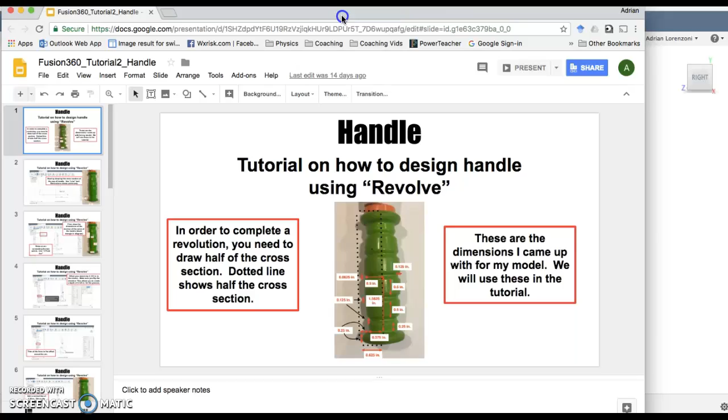So let's see, we're in sketch mode. We're going to use the line. This will go over 0.625. Go up 0.25. Over 0.25, and that's it for now.

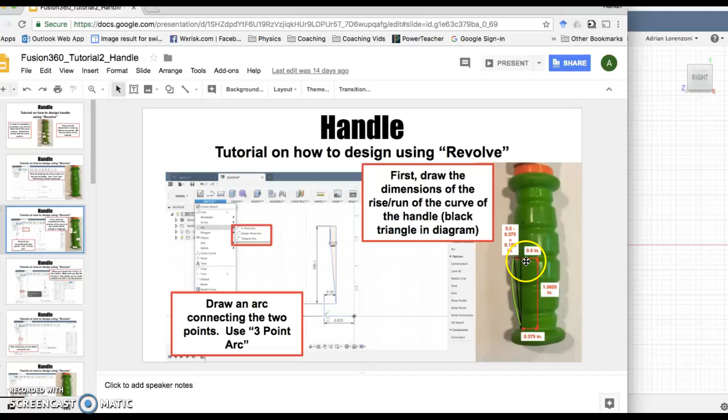So, escape. Okay, to give you an idea of the next step, we're drawing the arc. We want to draw this arc here basically. We go up 1.5625 and only over 0.125, which is the difference between 0.5 and 0.375. This will make sense as we go along. Up 1.5625, over 0.125. Perfect.

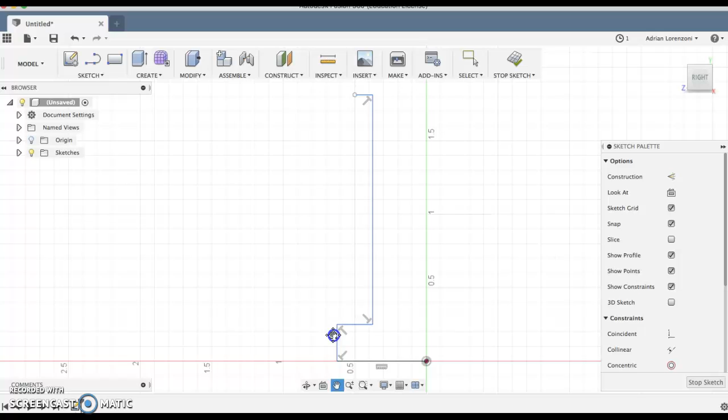Now that we have that, we're going to create the arc sketch—an approximate shape of it. Don't want to go in over here, obviously. Hold on, let me zoom in a little better, and around a little bit. Gotcha. There we go. Now we have the arc.

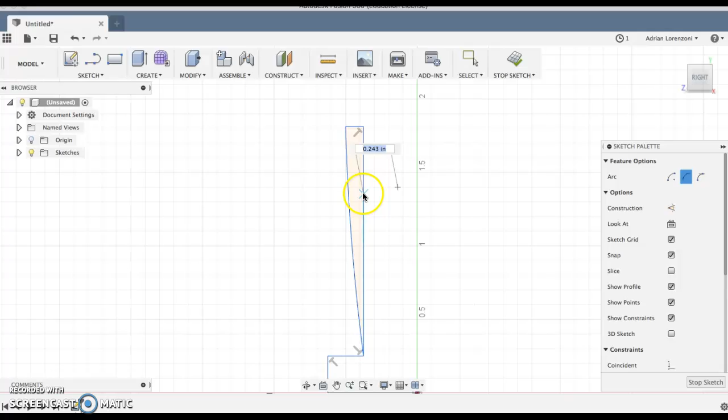Okay, let's see what the plan is here. So I'm first going to delete this and this. Then we want to make the groove, so we need the depth of the groove shown.

So what we're going to do is go sketch, offset, and go inside negative 0.12... that work? No, 0.125.

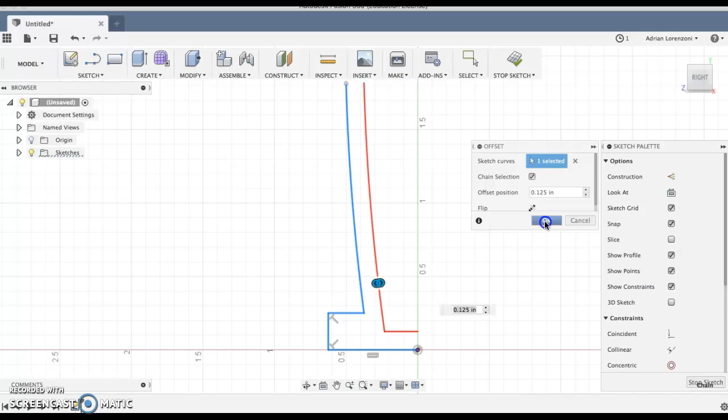So then hit OK, and now we have the offset. We're going to make the grooves of the handle with that—it's kind of based on that. We need to trim some of these lines if it allows us. Get that, delete—we don't want to do that yet. So now, what we're going to do here is draw where they are.

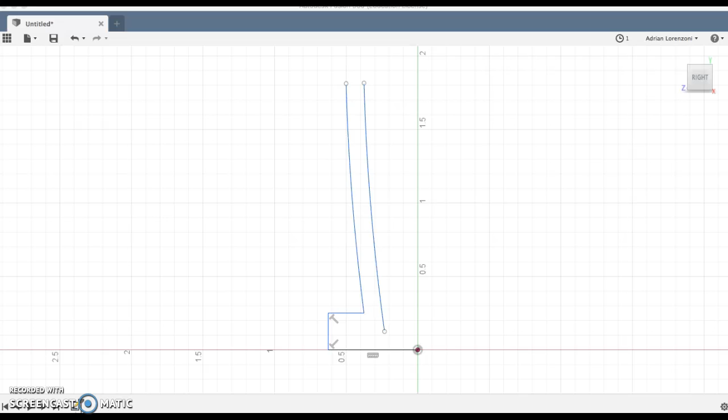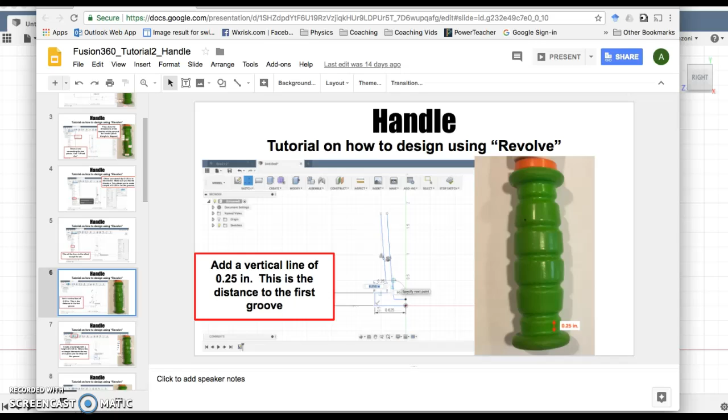So for the first groove, if you look, the first groove is 0.25 up. So we're going to draw a line 0.25 up. This will make sense as we go along, but just bear with me. So sketch—starting from here is 0.125 up from the handle.

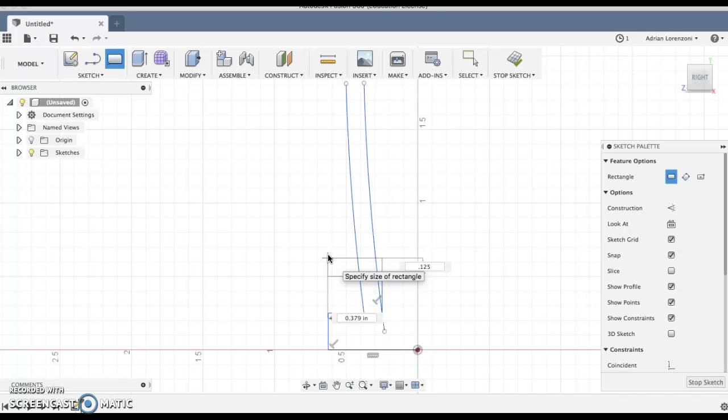0.25. Now that we have that, we just need to draw any rectangle that has a height of, I think, 0.125. So we get a rectangle—0.125, it can be any dimension. Just bear with me here, let's see what's going down in a sec.

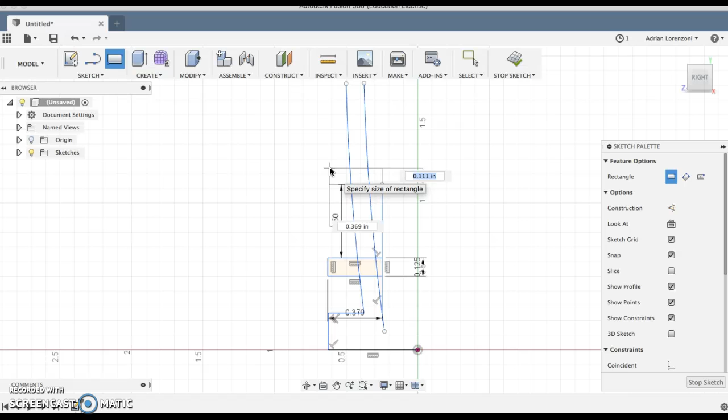And do the same process, except now we're going up 0.5. So we get a line here, 0.5. Then create a rectangle—the height of the rectangle again is 0.125 because that's the height of the groove I measured. Bam.

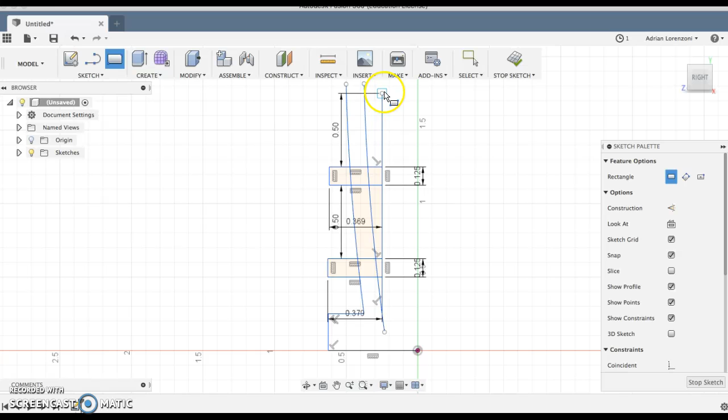Now we've got to go up again, we're going up 0.5 again. And the last rectangle, as you notice, is only half because we're mirroring—it's only 0.0625.

Cool, so now we have this, and now we just need to trim, delete, delete, delete. We haven't used the trim feature yet, and it's a little different in Fusion than what I'm used to, so bear with me here, but I'm just deleting lines.

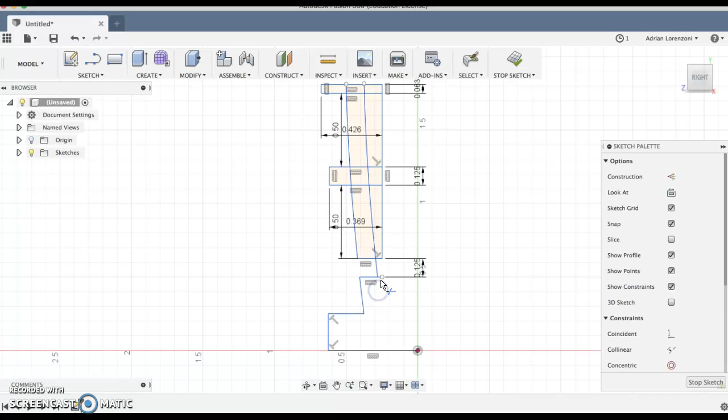Okay, so we want to delete that one, and that one, delete that one, delete that one, delete that one, that one. Hopefully you see what I'm doing now to make a little more sense. That one, that one, that one, that one, that one.

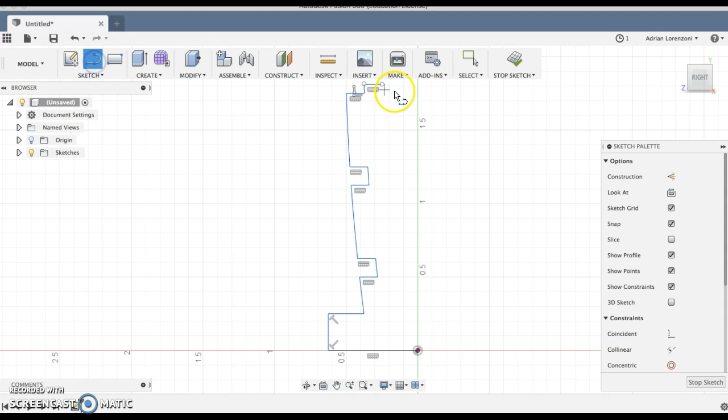Okay, and the last thing in order to revolve is you need a closed shape. Now before we revolve, you can either fillet the 3D or fillet the 2D. I'm just going to do the fillet on the 2D, so the sketch.

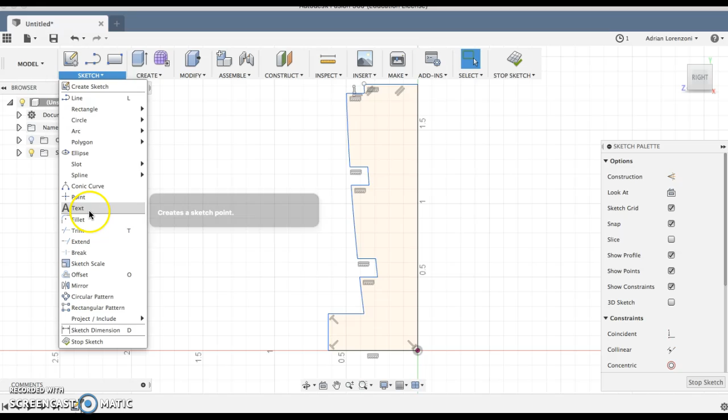So go here, fillet. Click the two sides and type in 0.05. Let's do all the outside ones at 0.05 all at once. Bam, bam, bam, bam, oh nope, look at that, 0.05.

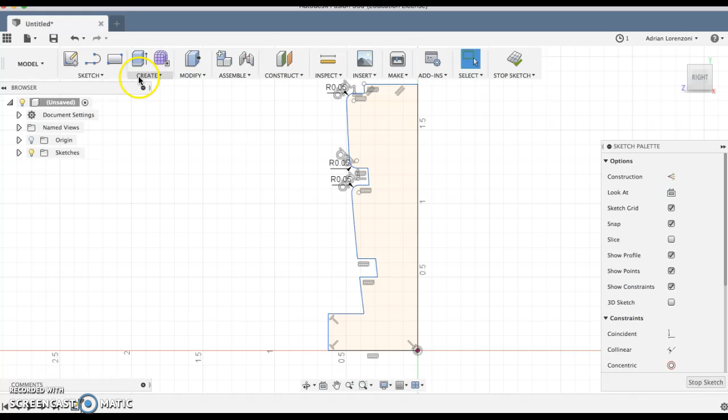Okay, here, then last, and that's that. So we got those grooves done, okay?

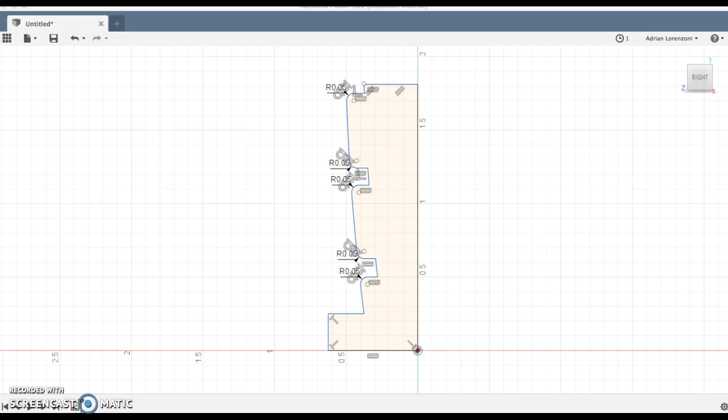And then I'm going to do all the interior ones at 0.062, which is about half of 0.125, so it's going to make a round interior. So fillet again, so that one.

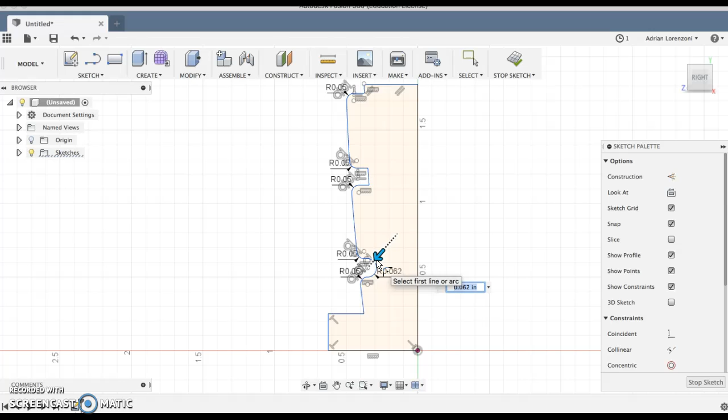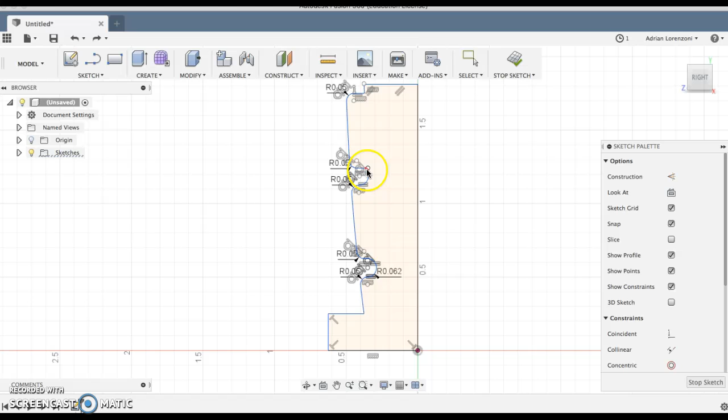0.062, okay, that one. 0.062, okay, that one, oh we're rolling now, that one, that didn't work, Control Z. What just happened? Make that one a little smaller, that's weird, that one, 0.062. What's happening?

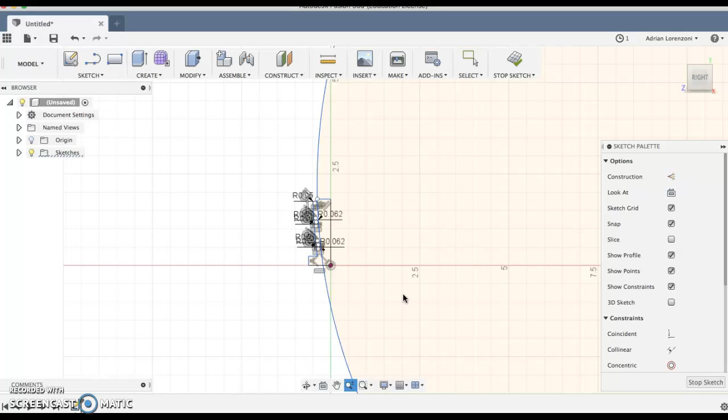Okay, let's just bear with it for now. Created like... zoom out, let's see what happened here. Whoa, it delayed the whole thing, let's delete that. Zoom in again. That looks weird. Okay, so we're moving on.

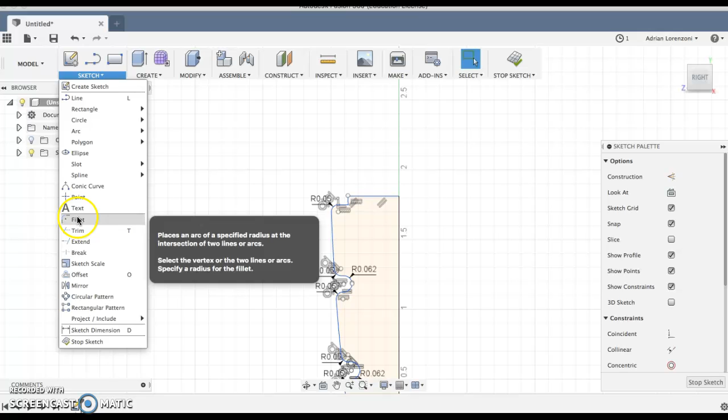We want to do the last two ones we're missing, so this one, 0.062. Oh, didn't like that, I made it not work. Let's make it a little smaller. Sometimes you might have to change because it wasn't pink, it was no longer a profile we could use. It wasn't closed, which is weird to think in that situation.

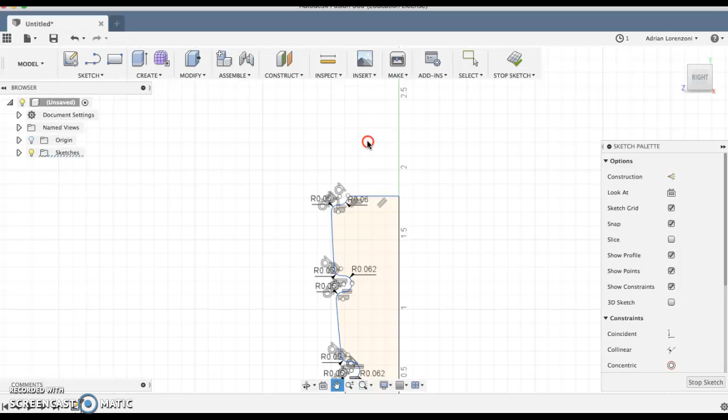Okay, I'm gonna pan down here. Gotta do this guy. This one. Ooh, I don't want 0.1 for that. I really wanted that though. Fillet.

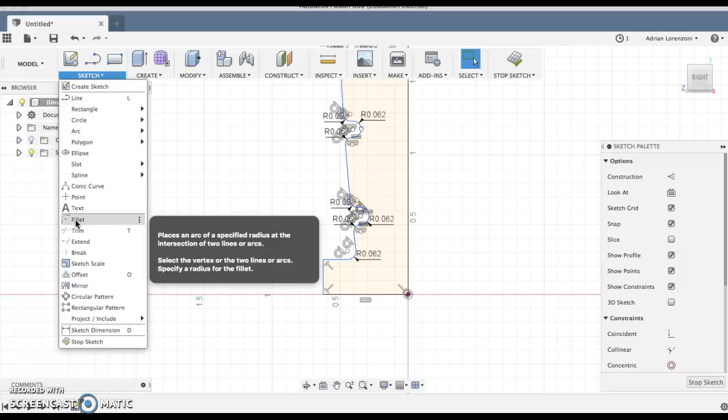0.062. Okay, and then we go to this last two, and we just want that to be a round edge, so it's going to be 0.25, 0.125 and 0.125 for this one. 0.125. Hit enter. Now we got round edges, okay?

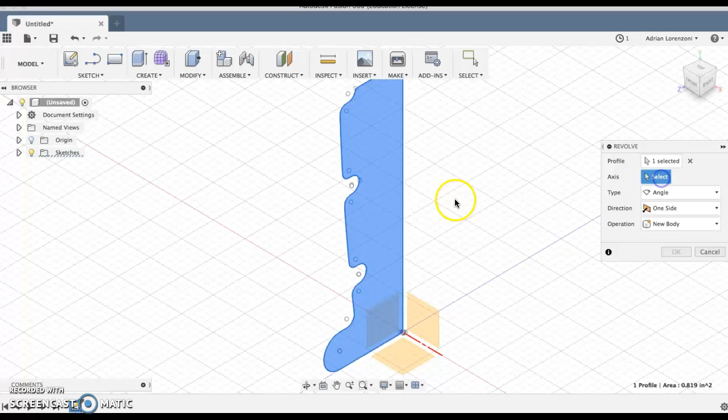Cool, so now we hit stop sketch, and then hope that this works. Then we go create, revolve, click it, and axis, this one. Okay, and bam, there we go. So now we have this pretty dope handle.

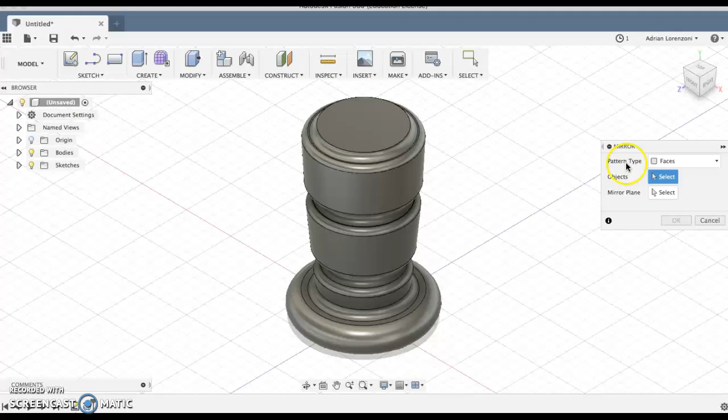Okay, we're moving along. I'm going to show you how to mirror. So go create, mirror, click the whole thing. You won't want a face, you want a body. Go body, mirror plane is obviously here. Bam, hit OK. Now we have two bodies, probably from this, right?

Yep, body one, body two. Okay, let's go back to that option. So let's go here. And then we're going to want to create a component from this and this. Create components from bodies.

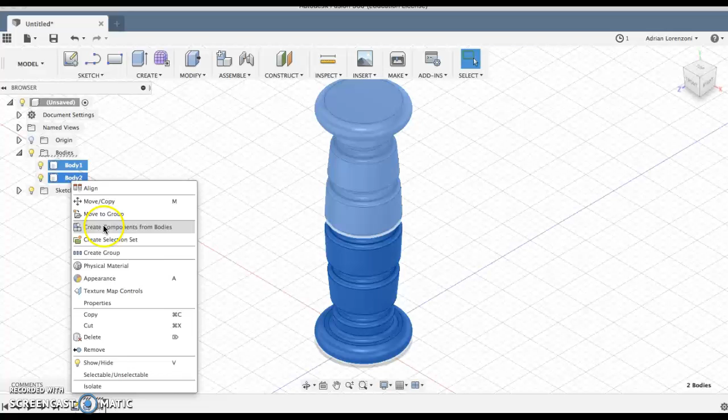And now we have... I wanted one, so hold on. We'll deal with the hole first, okay?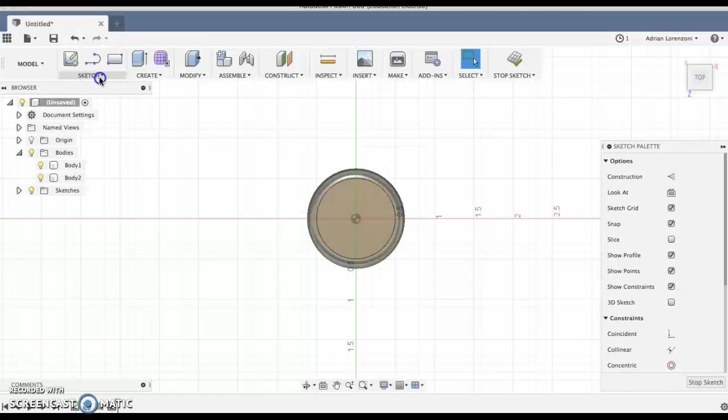Okay, so now we're going to have to drill the hole, so sketch up top. Sketch a circle. center point diameter, .5, enter.

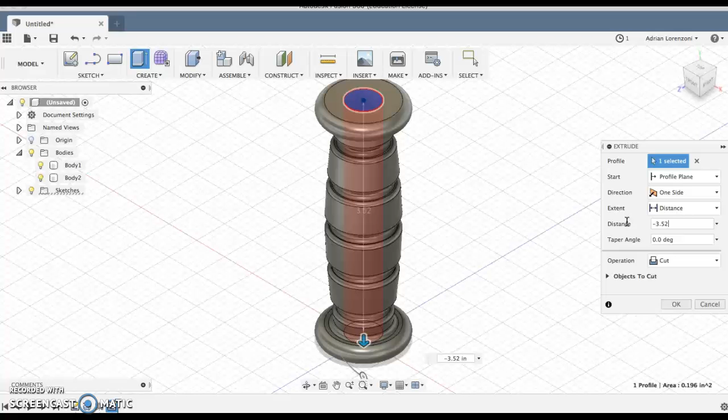Stop sketch, create extrude, click, click distance, negative 3.52. Okay, so it doesn't go all the way to the end, but it goes mostly to the end.

Almost done now. Okay, we want to combine, to make it into one body. So this is what I was trying to do earlier, but I wasn't doing a good job of it.

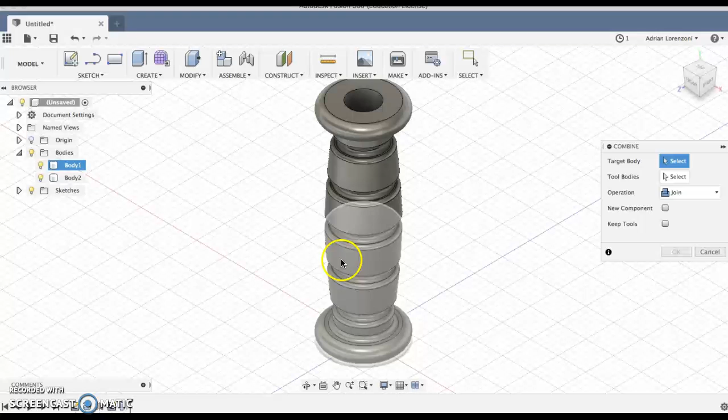So click modify, combine. Target body here. Select that. Hit join. Bam, now we have one body. Right click it, create component from bodies. Now we have one component.

And if you want to change colors instead of materials, sometimes you just want to make it look good, hit appearance. Let's see what we got. Plastic, texture... there was no green. Paint, you just want to paint it smooth.

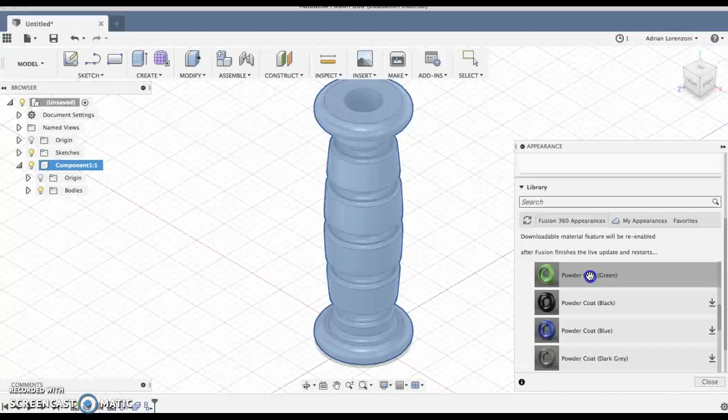Perfect, and there we go. We got a handle, awesome.

I hope you enjoyed this great tutorial. I haven't had coffee yet today. About to go get some.

Okay, but this is how it's done, that's how I made my handle. Obviously there's different ways to do it, but that's how I thought through it.